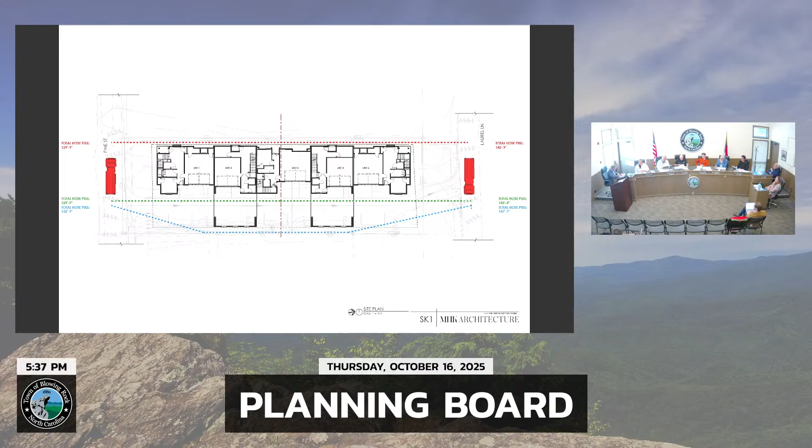There was a hot box installed with a sprinkler and a backflow preventer. If you've seen that on Laurel Lane, it's real bright silver, and they're working to minimize and camouflage that as best they can. Garbage collection will be in rollout containers on the west side of the property, adjacent to Pine Street.

And the proposed conditions, I listed those for you. I'll read those. The properties must be combined, because currently they exist as two properties, and we would do that before we issue a building permit. The applicant must submit and receive approval of a method to camouflage and screen the utilities.

The hot box that I mentioned. And the building heights may step up beyond the 35-foot max height at a rate of 1 foot of vertical height for every additional 5 feet of horizontal distance from the setback lines, to a maximum of 40 feet. That's the proposed conditions from the applicant.

Held a neighborhood meeting last week, and that's all the presentation. I will take you through all the plans. This is the landscape plan.

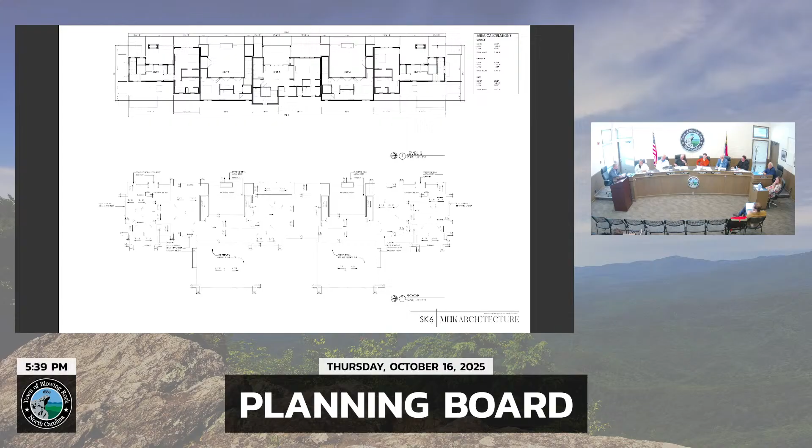The elevations and the renderings, materials. These are the floor plans. They're all 3-bedroom, correct? All 3-bedroom. They do meet the parking requirements. They do have garage units, but they also have some surface lots or surface spaces too.

That shows a little more specifically how the parking works and the drive aisle through that. You can see some individual parking spaces in between.

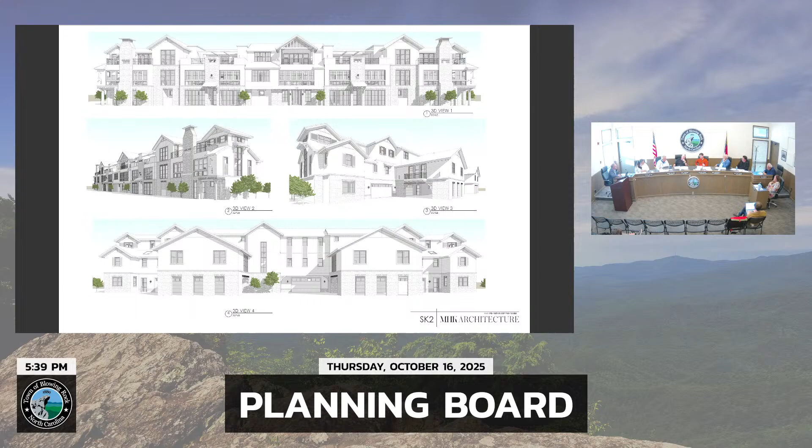So I can go back through any of the slides you'd like, answer any questions, and the applicant would like to speak and present what they'd like to do. So if it's okay with the board, perhaps we could let the applicant speak, provide additional information, and then we can ask questions as appropriate to either the applicant or to Kevin.

Okay, so whomever, if you could just identify yourself please. Will Garner, the Dealway Companies. Don't have much to add other than what Kevin said.

This is a much better project than what we had planned last year. We had a mix of 1 and 2 bedroom units that folks were going to try and use as 2 and 3. And so we got into construction drawings, we realized we were having ceiling heights of 8 feet, and it just wasn't going to work. So our plan was to back up to these fewer units, which are bigger, nicer units, more square footage, all of them 3 bedroom. We can park it pretty easily, so we just feel like we have a much better plan here, more successful than last year's.

Is that all you want to proactively cover? So, yeah, open it to questions of the board.

Just a quick comment and question. I love this plan, this is far better, compliments to you. This is much improved from the one that was approved last year. Fewer units, better finishes, slightly different height, a lot of differences in the facade. I like it a lot. Just a couple of minor questions.

The metal accents, are those going to be dark gray or black? It would likely be in a charcoal gray. Or like a charcoal similar gray? And is this going to be townhome fee ownership or condominium? Town, fee ownership. You're going to subdivide it into 5 separate units, okay?

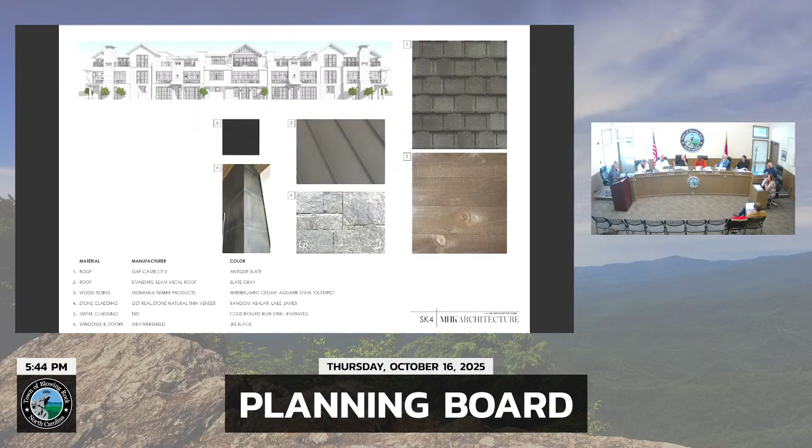Let's go back to the landscape plan. I would say more than that, because there's nothing but planted green space between the sidewalk and the building. There's not a sidewalk, there's not a structure.

So it only applies on the sides? It only applies between the street, the sidewalk, and the building. 'Cause then you would just count the driveway opening as the only unvegetated part of that strip. Right, okay.

Kevin, I have just a question about the site plan, and perhaps the architect might be better - the west property boundary that we're looking at, where is it relative to the retaining wall that's already out there? And will that retaining wall have to be moved?

We'll be using the existing retaining wall, probably extending it. Extending it toward Third and Pine, just kind of extend it to cover that parking area there. But the retaining wall is roughly on the setback, currently the side setback. Thank you.

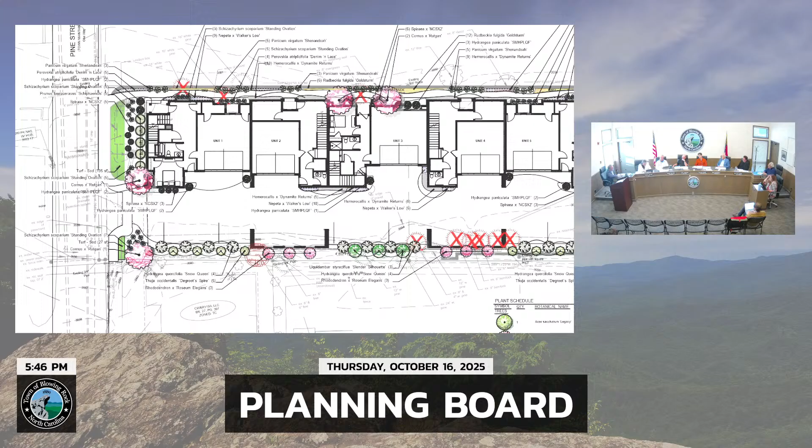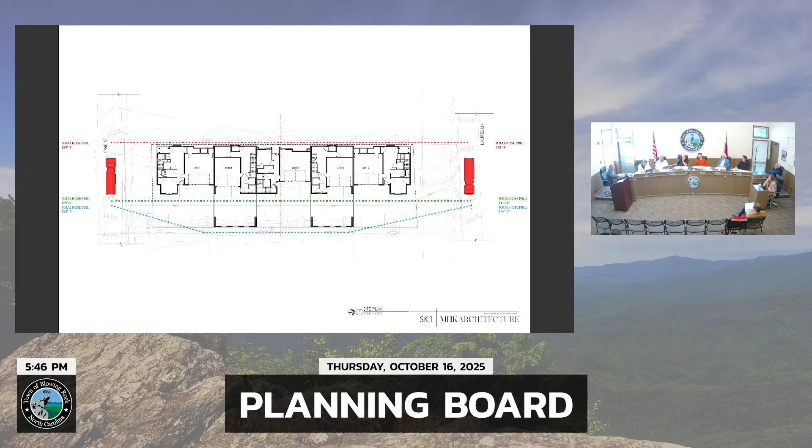You want to see it? You're not gonna see it from Main Street unless you're 30 feet in the air. Because the building - well, if you look in between the buildings, it's going to be there. I don't think it's - and we raised the height for central business just last year from 30 to 35.

And they're on 37, which, you know, I can see a few feet - well, they're actually 5. Right, they're lower than what was approved the same night that we adopted the code.

And the code had a provision, when they were approved originally, that allowed you to step back for every 5 feet you go back, you can go up a foot - that's the maximum that they're referring to in the application.

Yeah, we got rid of that, I guess, didn't we? We did, we cleaned that language up and eliminated that and just said limited to 35 feet.

But where - for the part of the building, so these are going to be on individual lots. So it's technically not one building, although it's one structure - if you look at it, you're not going to know the difference if there's a property line even there. But as you move to the inside of the lot, and it staggers a little bit as you get to the middle, your building height is measured from the entrance into the building once you get to that point.

Once you get back 35 feet from the existing sidewalk, you don't measure from the sidewalk elevation, you then measure from the entrance into the building. And so as you go back to that point, no other building walls measured from the average finished grade along the base of the wall to the highest point of structure may exceed 45 feet high. That was the change we went to, but we did clarify some of that other language and eliminated the step level.

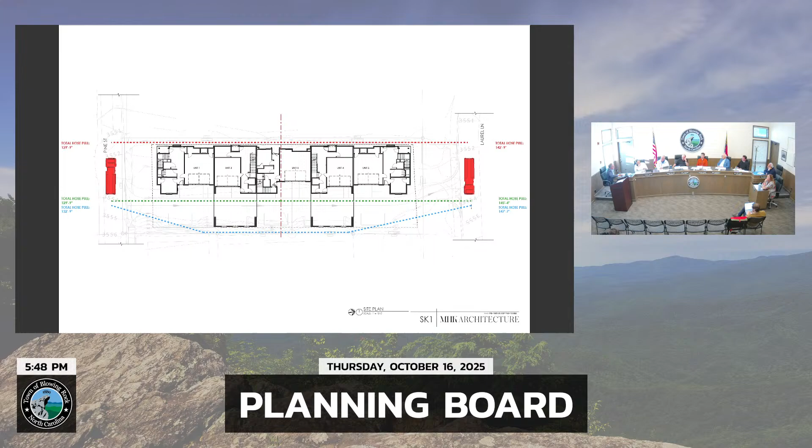They're just asking for that as a condition, to be lower than what they were approved at currently, and to be at 37 for this middle section, and then 37.1 and 37.3 - 37.3 there and 37.1 at that peak.

And that's fine, I just would hate to see it go higher than that. Well, then you could ask, as they propose a condition, if they would consider maximizing at what's been drawn on the plans at 37 feet. Because it's their condition, and ultimately it comes to council - they would have to be willing to accept that modification.

They would have to be willing to accept it at town council. I mean, we could make any recommendation. Whether or not, it's not us to negotiate.

That's right, but you can make your point known. So just as a comment, not a process, but from my perspective, I think we ought to stick with the 35 feet. Whether that meant a mansard roof so the space was still usable as envisioned in their plan or not, I'd be okay with that kind of change, but I think the 35 feet was important, like you said, something that was an upward change in central business intentionally, and going beyond that, to me, is unpalatable at this point.

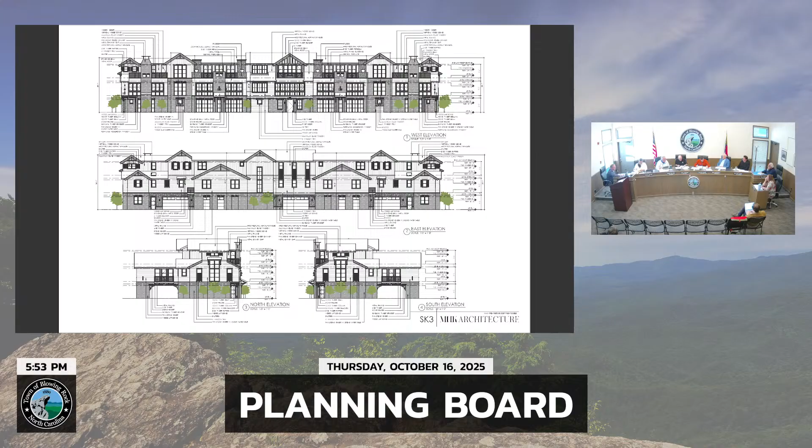So my only other comment is a materials comment, and this was not a code change, I think it was consistent. The code hasn't changed, but this is about the stucco. I don't know how much stucco is in here, but I believe our language was unchanged, that in Article 21, Section 4.2, it allows stucco only if it's specifically approved by the planning board and/or the town council. The way I understand that, it's an option for us.

I think we've consistently had a lot of sentiment about not having stucco in the downtown area. I know this is central business and not sitting right on Main Street, but still clearly a part of our downtown. From that perspective, and I see with the exploded view the stucco, which appears to be minimal, I don't think we should have stucco. We should not be approving stucco, which my understanding is, and I'm willing to be told I'm wrong, but my understanding of that section is stucco is allowed only if it's specifically approved by the planning board and the town council.

As a comment, the code says exterior building materials adjacent to a street—so stucco is not allowed facing a street. That's 4.1. In 4.2, in addition to those materials, stucco or other equivalent that are specifically approved by planning board and council, as the case may be—stucco may not be used to cover or replace old historic brick on existing buildings. So the way I understand 4.2 is stucco could be allowed in central business or elsewhere, but only as specifically approved by the planning board and/or town council.

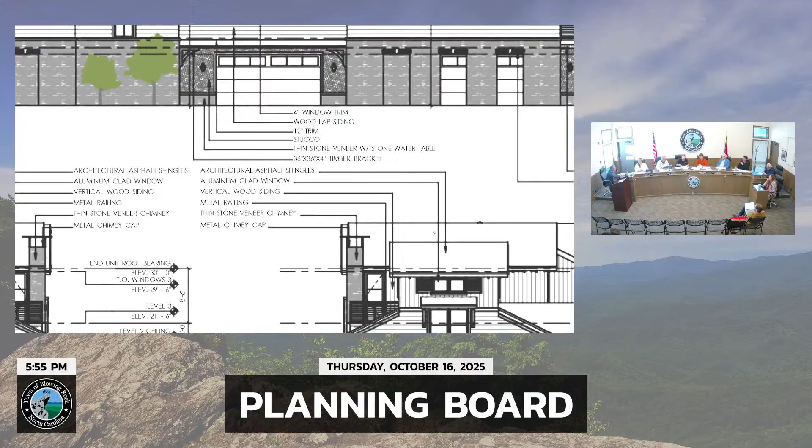So my conclusion is that I think we heard pretty loud and clear that people didn't want stucco downtown, and so my preference would be to not have stucco on the exterior of the building.

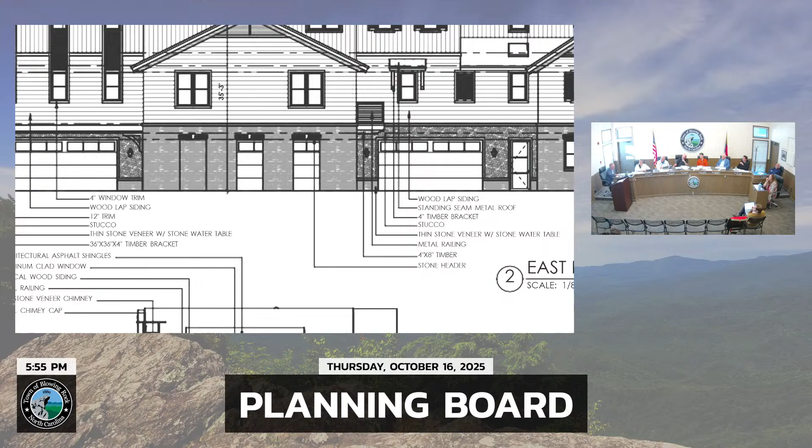So, this is a place right there. You've got this comes out, and this is recessed back inside, so it's beside that garage door. And on the other one too, that one, the three that are recessed.

Like everyone else, I love the plan, I love the garages, specifically getting cars out of visual. I think that's good for residents, good for our visitors to have a less cluttered look. I think the architecture looks great. Just a couple, again, what I'd perceive to be minor changes about building height and the stucco.

Any other comments among the board, discussion before we entertain a motion? Okay, would someone like to make a motion?

I move that we recommend to the town council that they approve CZ 2025-02 as presented with the applicant's proposed conditions. I'll second that motion for discussion. We have a motion and a second, discussion.

My only discussion would be, I would prefer we limit it to 35 feet and the stucco, but that's where I'm coming from with this. I agree.

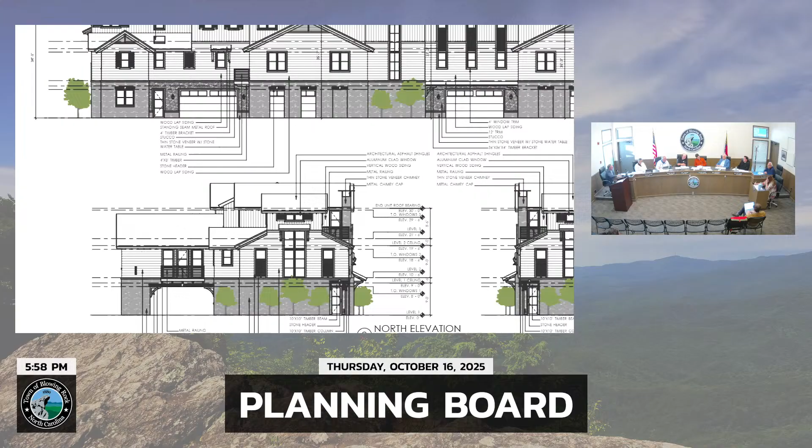But would you be agreeable to the limitation of the height to 35 feet? Without knowing what it would look like, you have to kind of play with it and see. And again, it's not the entire structure, just your tallest peaks there. I think we'd be more amenable to limiting the condition to 37.5 or something that gives us what we're asking for, no farther, to maintain the design integrity versus the risk of going to 40. That's something that the board members would find amenable.

Correct me if I'm wrong, the first floor is 9 feet, second floor is 10.5, third floor is 10. Does that sound right? I believe it's 9 for the first, 9 for the second, and 8.6 for the third floor, plus 18 inches of structure for the first floor and then 2 feet of structure for the second floor. True, yeah, true. Okay.

Any more discussion among the board? All right, let's have a vote. All in favor? Anyone opposed? I believe that carried 4-3.

As a recommendation, again, we're an advisory board, and town council will get to hear this and provide their wisdom on this. All right, thank you. So we'll move on to the next item on the agenda. Is there any old business?

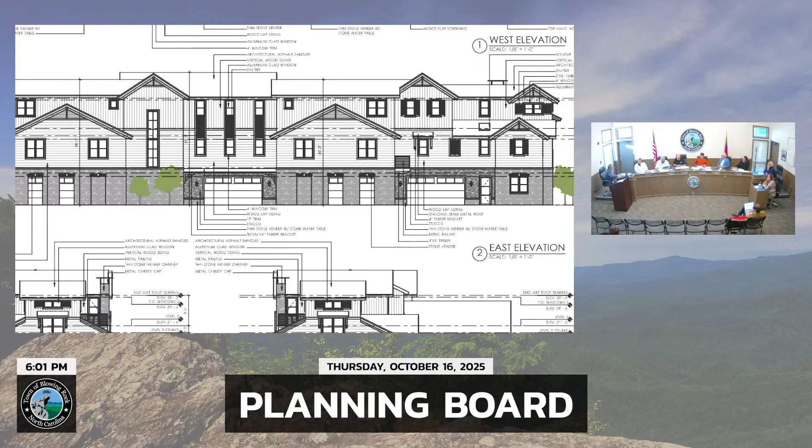Any questions, Kevin, or other subcommittee and committee members who were here? Did you find out any more about Senate Bill 382, what the prospect is for the down zoning? I don't know all the numbers specifically.

Yes, I'll have the presentation if anybody wants it. I'm sure that was a hot topic this week. It was, today we spoke a lot about it. There's not anything in the statute about nonconformities, but there is in everyone's ordinance, in how it addresses nonconformities.

There were questions about whether or not you could adopt a new UDO. Yeah, a lot of people are just holding it. They've got them done and can't get them adopted. Mills River got special legislation so they could adopt their UDO.

So we're not shaking the tree on some of the things that we had wanted to do as a subcommittee or as a planning board to move forward. There's been a lot of promises that, hey, we're going to address some of the things on this down zoning bill that was approved in December, but there's been no action. So our hands remain tied in a lot of ways.